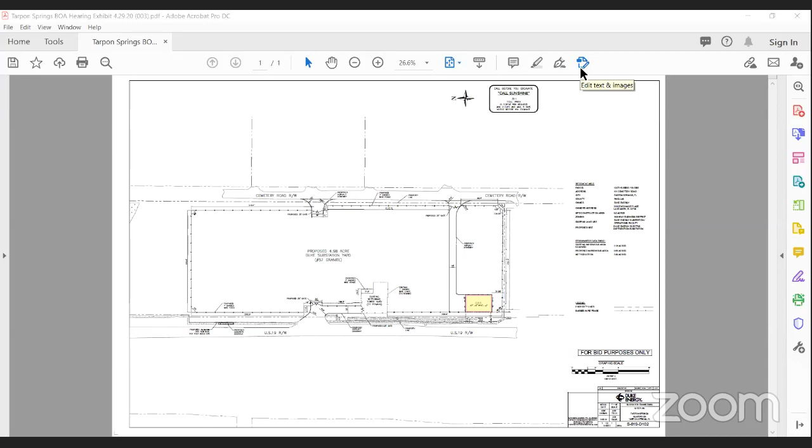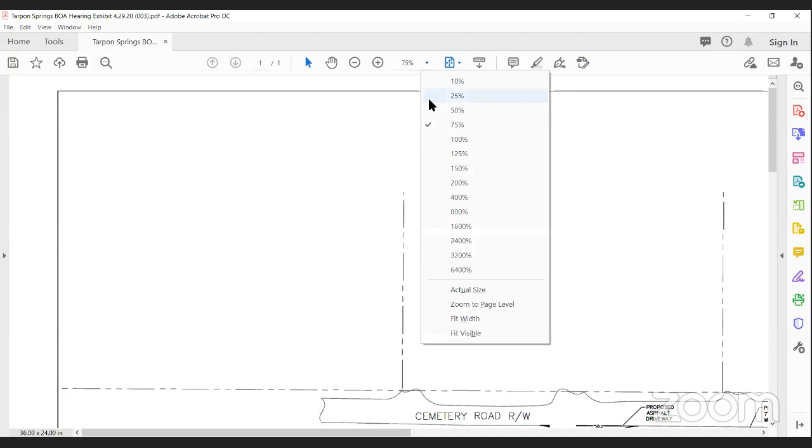The expansion of this substation is necessary to both respond to the growing demand for electrical service in the Tarpon Springs area and also to provide increased reliability in the provision of service to Duke Energy's existing customers. The exhibit on your screen is a simplified version of the substation expansion plan, and it specifically calls out the location of the control equipment enclosure, or CEE building, located in the southeast corner of the drawing. It's the square or rectangle shown in yellow.

Perfect. Again, our request is to allow for a 12-foot setback from the US 19 right-of-way for this building. The reduced setback is necessary to accommodate minimum separation requirements of the National Electrical Safety Code for substation components, and also to maintain safe employee access to this control building.

It is important to note that the CEE building will be constructed flush with the perimeter security fence of the facility and will connect to the fence. In other words, no portion of the expanded substation, including this building, will extend beyond the fence line that is on the property today. So there will be no encroachment past the existing fence line. We thank you for your consideration of our request.

We also have subject matter experts on this call who will be able to answer any questions that I'm not able to answer. Thank you. Thank you.

Joanne, I do have a question. I'm not familiar with substations in general, but you mentioned the safety regulations. How often are those regulations updated? I'm asking because if right now it's meeting the minimum separation, and if those regulations changed to require a broader separation, is that component of a substation sometimes moved to meet that requirement?

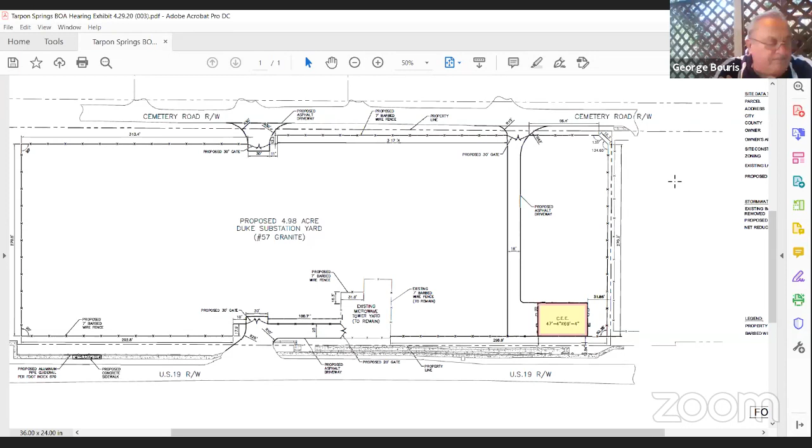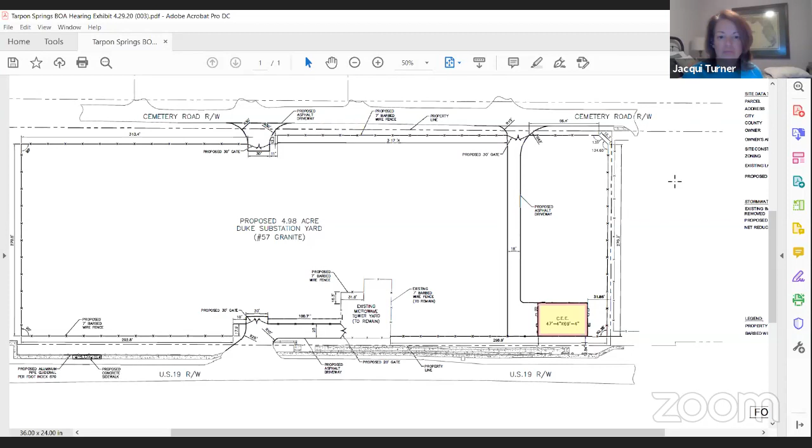This is Jacqui. The CEE building, this is the substation we're talking about. Like Ms. Rich said, we're not terribly well versed in the substations here. This is the building that's being constructed. All the other structures are existing. So yes and no.

They're on the facility today. You'll probably have realized by now that the site plan is turned on its side, so north is actually to the left and south is to the right, because the roads actually run north and south. On this property today is an electrical substation, but there are also office buildings on the site today.

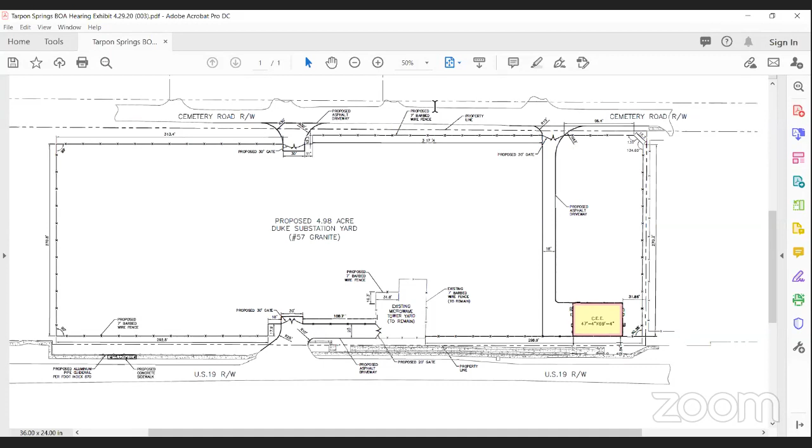The facility will be completely renovated and upgraded and expanded. The office building would go away and the expanded electrical facilities will take over the rest of the site. There is a CEE building on the site today, but because of the expansion, that existing CEE building will be removed and the new one placed in the location shown on the site plan.

So the one that is being removed is on the same physical space? It's on the same physical parcel today, it's just farther north. Okay.

And what's the height of this? How many stories? The height of the building, I am not specific on, but I know it's just a single-story facility. It does not have multiple levels. So it is a 1-story building, approximately 3,200 square feet. Okay, thank you.

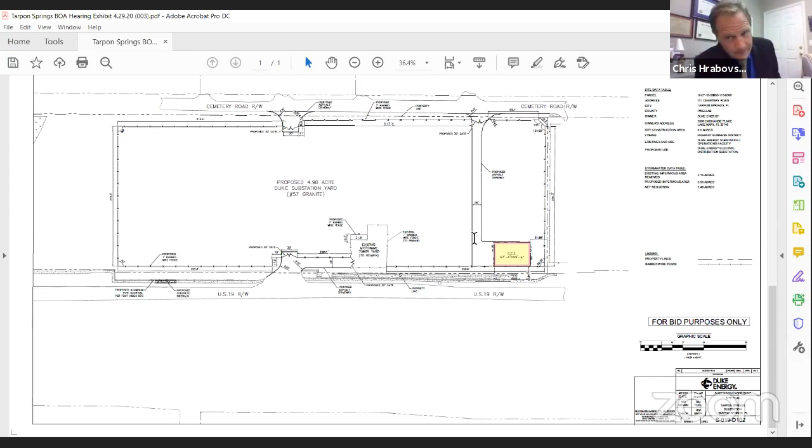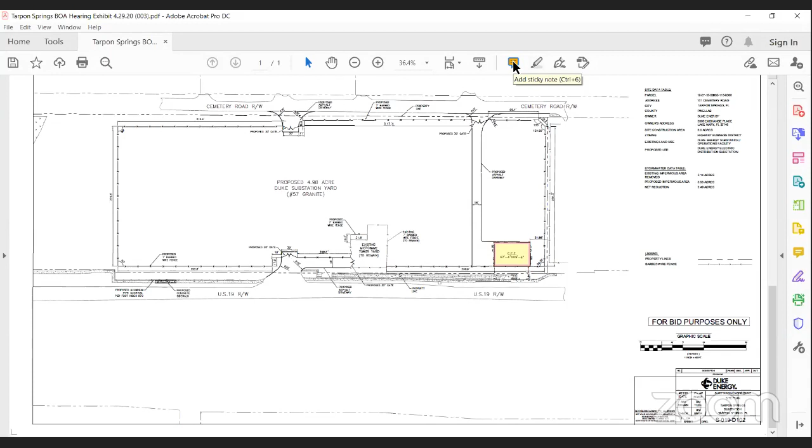Mr. Eisner. Yes, thank you, this is Mike Eisner speaking. What is usually put in this building? What is stored in the building, or what is the purpose of this CEE building? Certainly, the building is primarily communication facilities that facilitate the way the substation communicates with other substations, with other Duke Energy facilities. It's exactly what you could imagine, a lot of communication equipment and electrical components within it.

Was there any thought given to keeping this so close to 19 that it could be in harm's way by being so close to 19? We did have careful discussion of that. It's typical that the CEE building is on the perimeter of a site for access and distance requirements. So being located where it is, no closer to 19 than any of the perimeter fencing on the site today, was deemed to be an appropriate location.

So when you say this does communication, give me some idea of what magnitude. Is it for all of Tarpon Springs? Is it for Tarpon Springs and Palm Harbor? What would this be? Sure, this facility actually supplies service and serves customers outside of the city of Tarpon Springs. It is a facility that connects through lines to other facilities and includes other areas within the county.

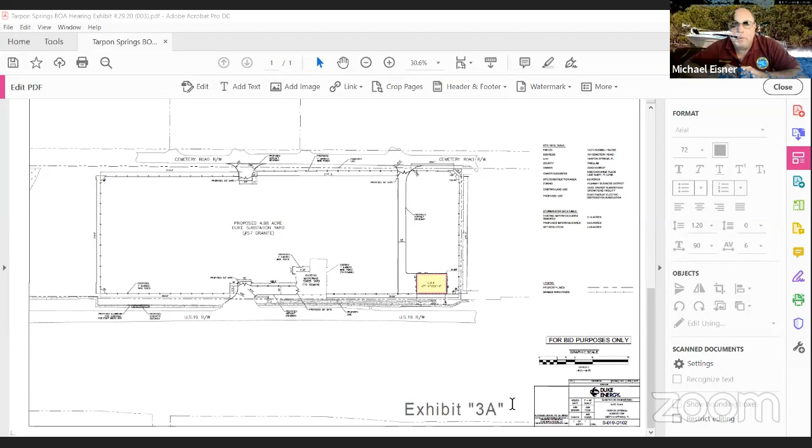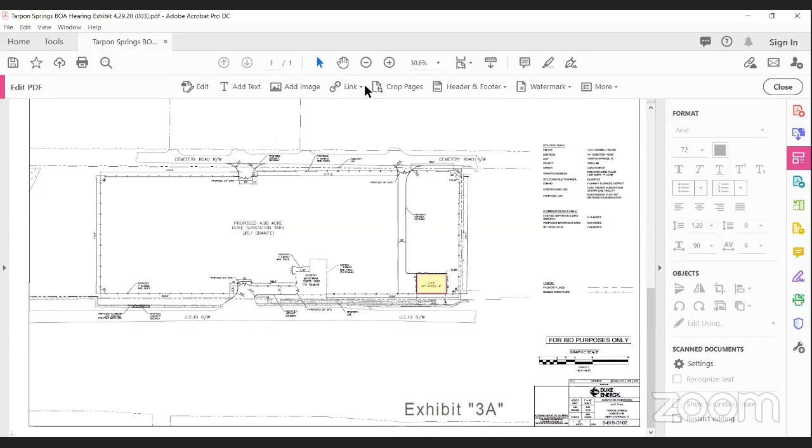Well, there's at least 40 feet from the edge of the pavement to the fence location, so there is more space than you might think from our conversation that would separate any vehicles from that potential. There's also, I'm not sure if all of you are completely familiar with this stretch of US 19 - there is a guardrail adjacent to the roadway that separates the sidewalk from the roadway, so there is an additional safety measure between any cars on the road and this area.

Okay, do you have any more, Mr. Eisner? No, I was just looking for a response to that, and I like the response that came back with the guardrail. Thank you. So, Ms. Hathaway. Yes, sir.

You heard my question to the city that the conditions described are not self-created and are not the result of actions by the applicant. We have a review criteria for variance, and we have to meet each condition. It seems to me that this is self-created, and therefore I was wanting to ask you what efforts were made to keep it within either the footprint and/or within the required rear yard setback rules of Tarpon.

Certainly, and I absolutely understand that question. With the expansion of the facility and the need to expand and upgrade it, a number of items go into the consideration and design of that site. For example, this site has facilities on it that are almost 30 years old. Obviously technology has changed since that time, and the design of electrical facilities and substations has changed since that time. So I always think of these substations as almost a three-dimensional puzzle that one has to put together to fit all the pieces necessary to create this substation and have it function as intended, fitting them within a parcel of land and within those particular setbacks.

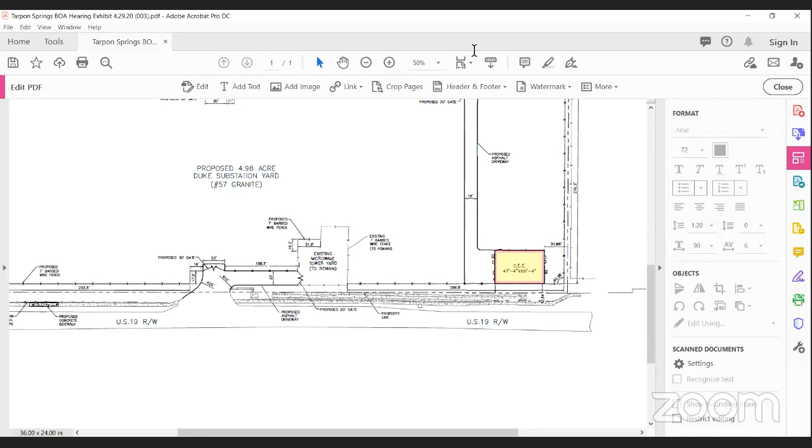There is fairly significant landscaping on the property today along the US 19 area, and some of that landscaping will remain, though I don't know exactly how much. That's within your property or US 19's property? Probably both. Some of it is probably landscaping for the roadway, but there is definitely some landscaping on the site, and we would be happy to work with staff through the permitting process if additional landscaping is required on that site.

In other words, on Cemetery Road, you have landscaping, is that what you're telling us? I don't recall the amount of landscaping on Cemetery Road, but I know the majority that I'm aware of is on the 19 side. And it's part of your site or part of 19? On both.

Has the city any requirement on a property this size to have any particular square footage of shrubs or trees or anything like that? Is that staff? Staff, yes. Erica, you may know. Honestly, my comment was going to be, I'm not really sure what this has to do with the variance criteria. If you could fill me in on what criteria this is related to, I'd be happy to have staff answer that question. Well, my question pertains to the 12 feet that I want to bring it down to from 25.

Are they planning to do anything on that, as far as landscape buffering, because I believe the testimony is that it will be flush with the fence line that's already there. But if that's the case, staff can certainly answer the landscape buffering question. Yeah, that's something staff will look at as part of the normal permitting process for that control building. This is an existing facility, so we're obviously not going to require landscaping of the entire site, but for that building, we can look at that during the permitting process.